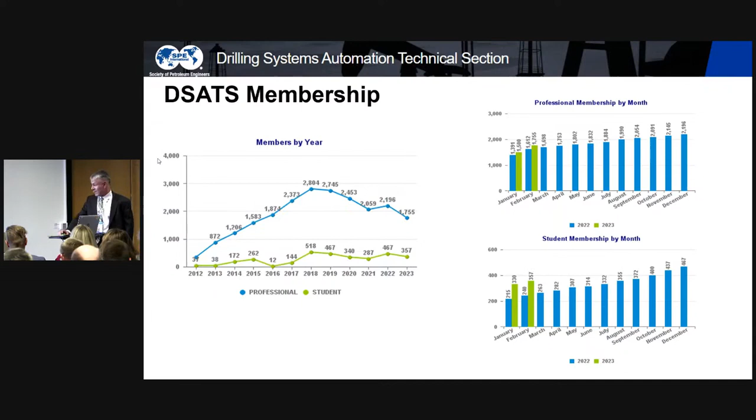One of the objectives for the section is to maintain this trend and keep engaging young talent. Here is similar information on how membership is distributed across areas geographically on the left side, and on the right, what subsegments are represented.

Typically, service companies have the lion's share. We're trying to balance this out and have more contractors and operators come in, as well as consultants, academia, etc. I think we have to have all the participants in.

Age-wise, I think we have a healthy trend. Majority of the members are in the middle. We have, of course, more senior people, but a good chunk of the younger population, and we need to work on that. So all in all, it's an improving picture. It's a healthy section that is improving the membership.

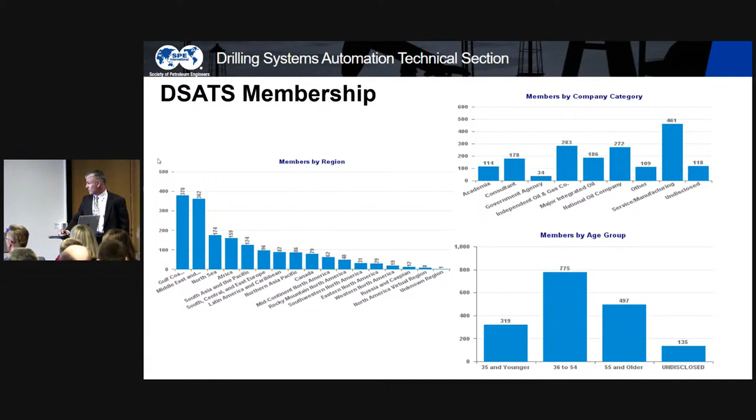So then this slide, I just want to spend a few minutes summarizing the current activities of DSATS. These are strictly volunteer-driven activities. We have a new website this year that complements the one we get from SPE. This gives us the ability to promote more interaction between members, have blogs, have discussions. The traffic so far has been much higher than what we had with the prior website. So that's very encouraging, and that's work in progress, it's ongoing.

Now, the real initiatives, the DWIS, Drilling and Well Interoperability Standards. This is probably the biggest initiative right now in DSATS. We have 4 work streams in there about the interface, the architecture of automated rig, real-time signals and semantics, and the drilling quality and data quality and uncertainty.

There is a website, you can find all the information and a lot of documentation. I think it's worth visiting that. There is a lot of information, a lot of material there, and for all of them, I would like to encourage people here to participate actively. I have a comment on that at the end, conclusion.

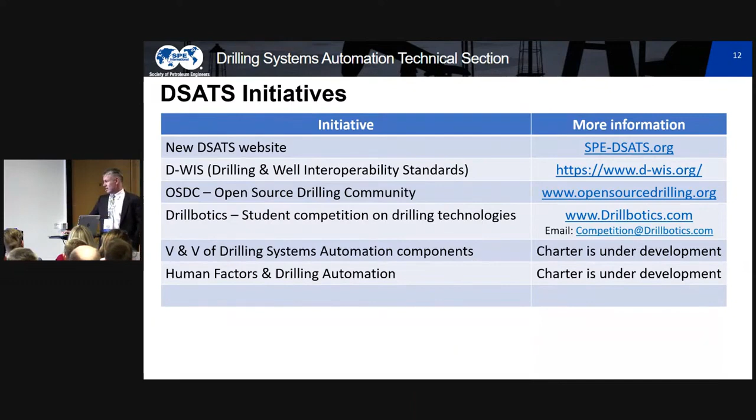Human factors is a huge area. It's not only with the operators, so we don't overwhelm them with data, screens, etc. But from the very beginning, when we design an automated system, we need to consider the process, situational awareness, what people know, what they see, what can go wrong, what if this happens.

So I have a couple of slides on the Drillbotics specifically.

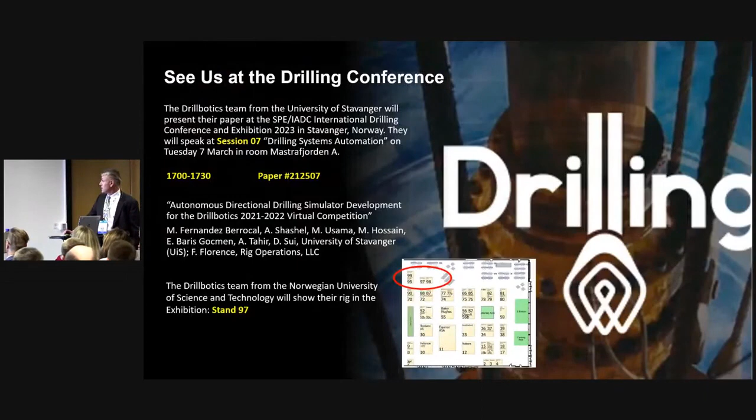Here is the information on the booth, but I'm sure you cannot miss it.

Other events that the section has organized. Last year, we had a joint session with wellbore positioning at the ATCE. We had a DWIS workshop in October. That's 2022. Going forward, we have the meeting today, the annual meeting, and an excellent panel and discussion at the end.

There is a workshop next week in Kuala Lumpur, drilling automation, breaking boundaries. There is a forum that Matt, Isabel, and a few others are putting together in April about digital workflows for well construction, which I think is going to be an excellent event.

And the ATCE this year is San Antonio. We're going to have a special session, a joint session with geothermal, with Tony Ping. I think that's going to be a very good event as well, and it's going to have a social reception at the end.

Those are the main events, but there are a number of webinars and SPE live events that we have throughout the year. We have 5 or 6 this year, only 2 allocated assigned speakers. We have a few openings. If anyone wants to share the work that they are doing with the community, please get in touch with me.

Something new that we tried this year is we have bi-monthly calls open to the entire DSATS membership. It's the second Thursday of every other month. There we give an update essentially to everybody, even non-DSATS and non-SPE members, anyone that is interested in drilling automation, update on the initiatives I explained earlier, what's happening within DSATS and how people can get engaged.

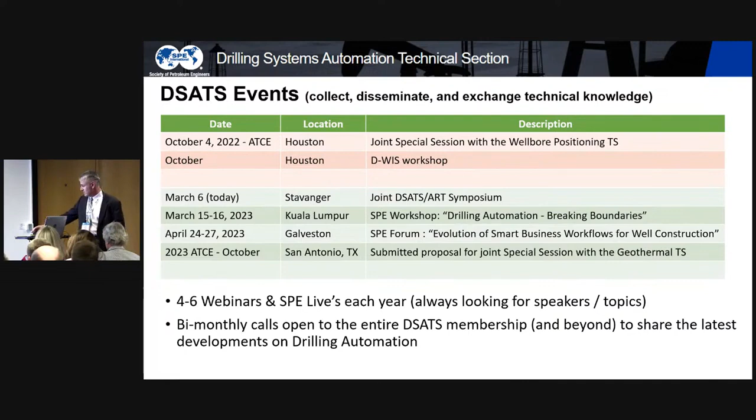Taking a step back and looking at the bigger picture, last year, at the end of 2021, early 2022, DSATS went through an exercise of rebranding itself, what we call V2, DSATS V2, trying to bring in new ideas, new charter, new people, etc.

So the result of that work was a long list of ideas and potential initiatives, and that made the foundation for a living document of initiatives that we can pursue. And to that, we are adding topics that come up in the symposium and the events that we have, like this one today.

Now, this is a pipeline that is full, I would say, but like I said, we need people to push those initiatives forward. They're not going to go by themselves, you know.

In terms of accelerating the pace of adoption of drilling automation technologies, one topic that always comes up is business models and how we reach alignment between the different subsegments. Even though we are not a business organization, we are a technical section, I think there is an overlap here, a sweet spot where as technical people we can work on technologies that make business sense and provide benefits to all people involved, and not develop something just for the sake of technology, then struggle commercially because the people who took the risk don't see the reward, and all these other reasons that slow us down.

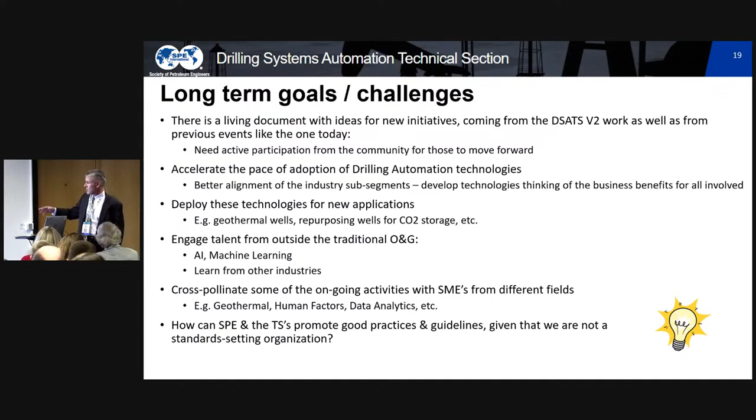Through DWIS and some of these other initiatives.

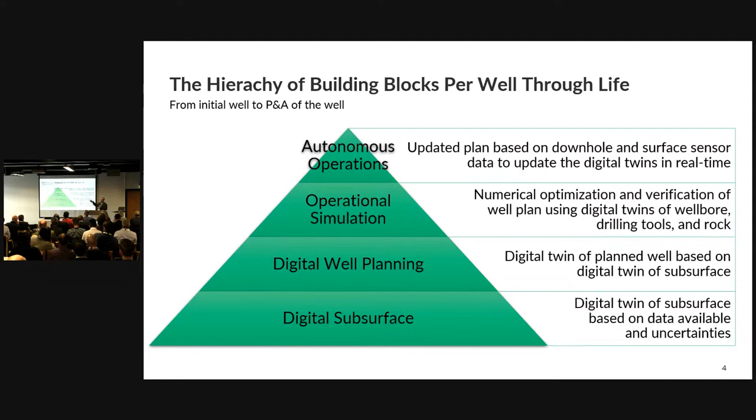So first, a bit when we're talking about digital twins - and I think this is an important element. We're talking about automation here specifically, but in reality, we're talking about huge end-to-end processes, big digital twins, where there are semi-established workflows already in place. I'll just go through them briefly and give you a flavor of the challenges.

I'm not going to spend so much time on subsurface, but before we start to design a well in Aker BP, there's around 17 data types that we need to collect before we start to design the trajectory. If you look at the subsurface domain alone, just in Aker BP, we're talking about up to 150 applications producing results, and we choose which become part of the design concept we're working on.

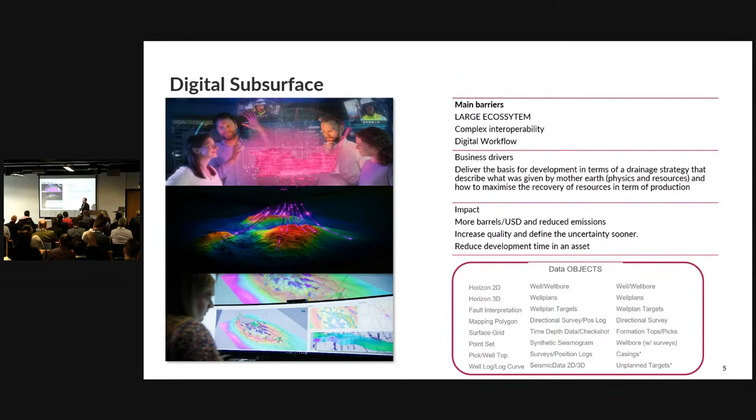And we are maturing this ecosystem for sure. It's a large ecosystem, complex interoperability, and different kinds of maturity when it comes to having a digital workflow. So that brings us over to digital well planning.

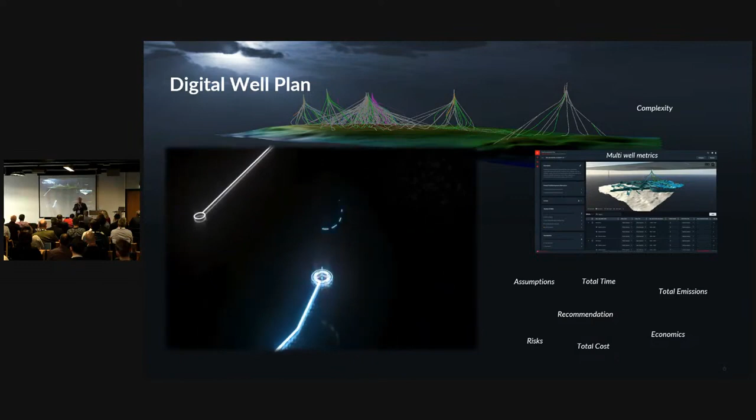One thing that's interesting in this concept, and the reason we made this animation, is because we often find ourselves a bit misunderstood. For us, it's not all about the data being in one place - the challenge we have is actually the workflow. This circuit board is just showing how Aker BP designs a well, how in the past we had to manually move all the data between applications.

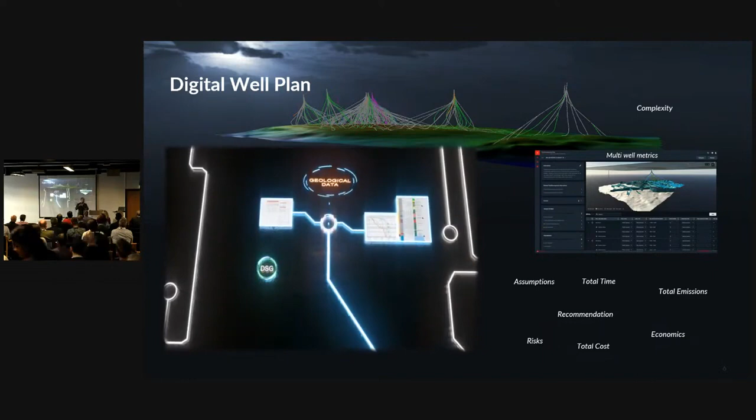We had to manually move all the data between 50 applications. Now that we have a digital ecosystem where the data can flow more seamlessly, it means we have a whole different speed. It means we can change out different components, work very differently on a platform, and plugins and other application layers are much easier to adapt into our work system.

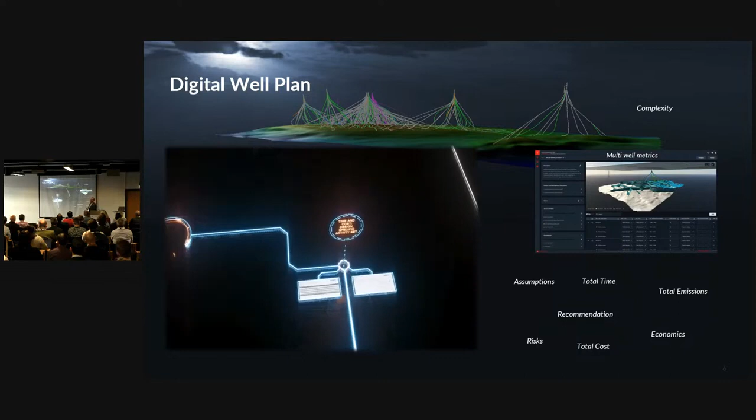Still the same challenges and still a challenge to keep an overview, but this has really fundamentally helped us change the way we work. It also means we can start to do more proper design earlier in the field development workflow.

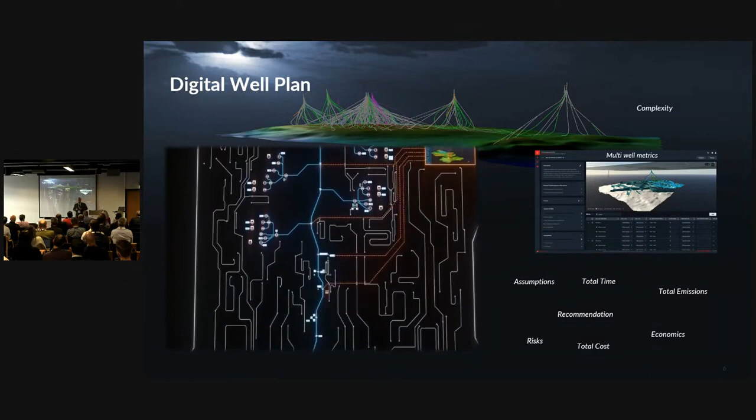So after we have designed the well, what do we do? Well, then we need other digital twins. Often in Norway we stand on ski jumps - I've not done that myself, and I would not like to - but sometimes I think that's how a drilling team could think. You have one shot, you're looking into the abyss, and you need to jump.

And what's expected from management is, of course, that we do this 365 with 5x20 style points every day on all our rigs. That's what's expected. And we have no place to really train and test out the scenarios.

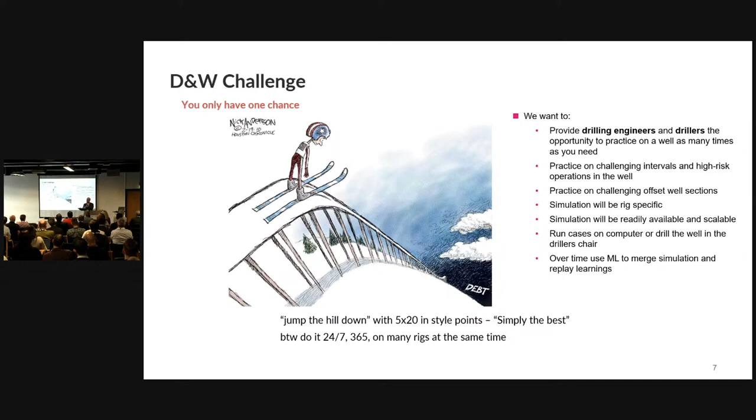So this was the concept of drill a well on simulator, to move away from drill a well on paper and start to utilize a lot of the digital twins we use in engineering as preparation tools before we go offshore. We've come some way on this, and there are a lot of vendors involved, but there's still work to be done.

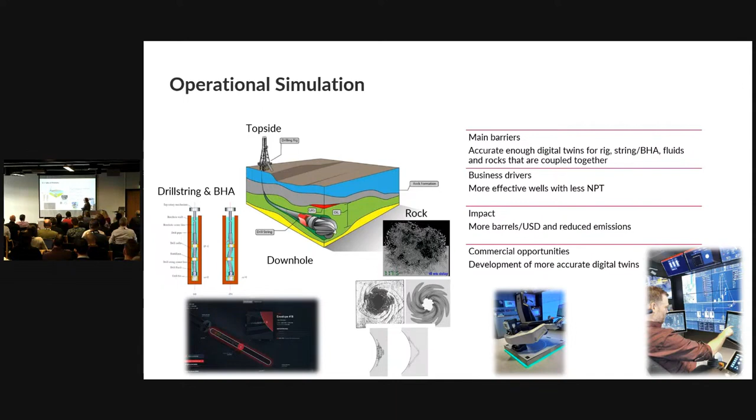And what's the last thing we go into then? Well, then we start to drill. And what happens is you have an enormous amount of data sets that are correlating and that you need to try and coordinate - whether it's robotics or visualization aids.

So what we've worked a lot on is how to capture all the engineering data and contextualize it with the sensor data we have from the tools or from the rig, to make it into a picture so you get to understand what's happening underground while you're drilling.

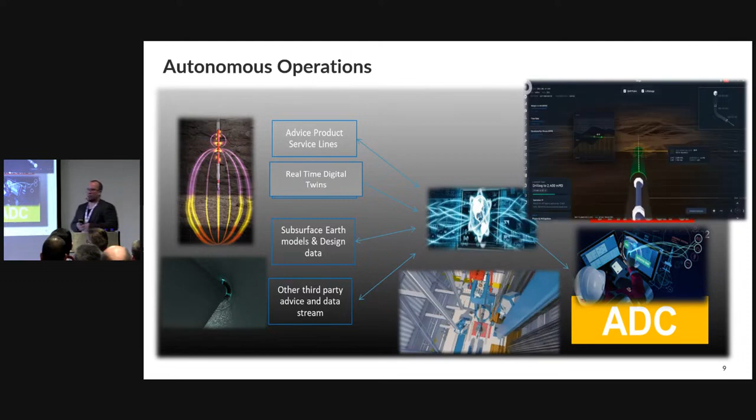These are technology sets we're really exploring, also combining them with, for example, more along-string measurement tools that we can use to fuel the different digital twins while in operation. Because a 9 5/8 hole isn't a perfect 9 5/8 hole after you've drilled it - there will be cavings, there will be different things. It would be good to see, when running the casing, if there will be a challenge in a certain section. It's an example.

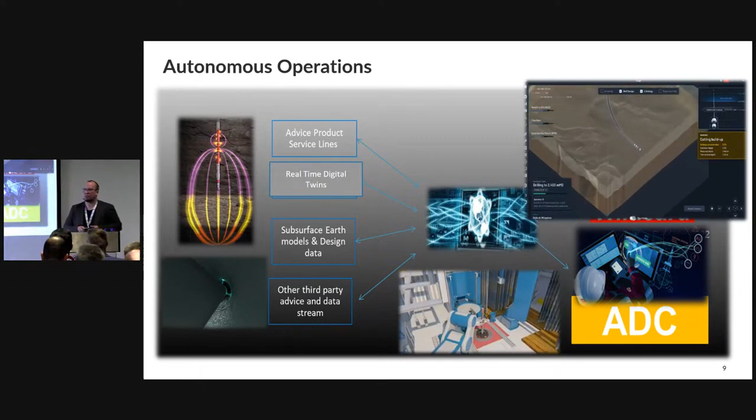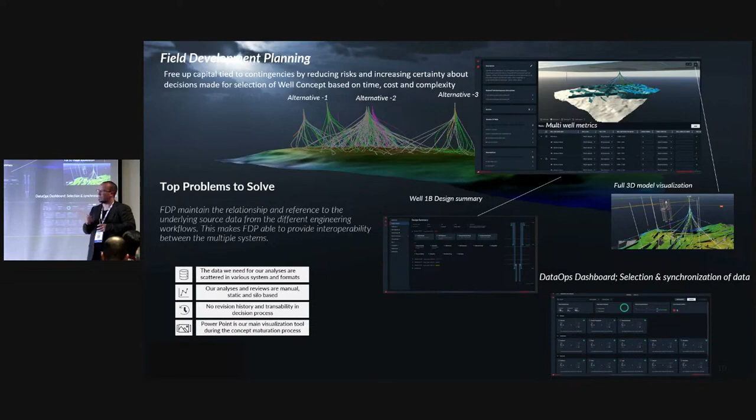The last thing I'd like to talk about is a bit of a top problem to solve: our overall ecosystems and how we run our projects and develop our assets. The challenge is that we have data spread around in various systems and formats. Reviews are manual and often silo-based. There's no revision history or transferability. So when interconnecting business units, if you want to know exactly which subsurface interpretation was there when you designed a well, that's a manual thing to figure out. There's no system that helps provide that lineage. And at some steps, we're still a PowerPoint-driven industry when it comes to making decisions.

So we've been working very hard to establish bigger data-driven platforms where we can interconnect the different platforms together, so that we have that kind of overview, but still have the flexibility for each business unit to develop their own workflows.

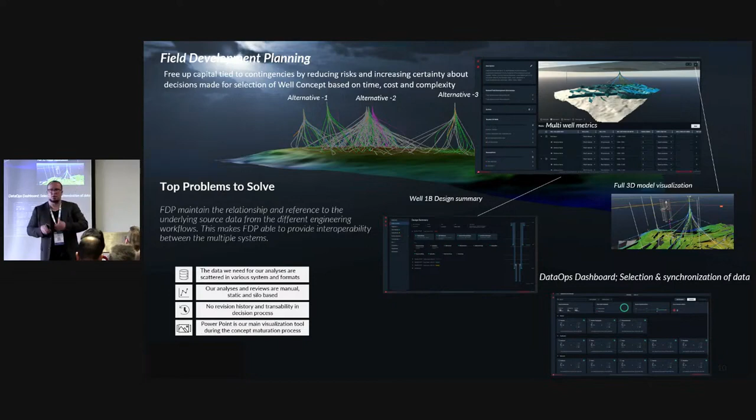That brings me back to the start. What does it mean to become data-driven? First of all, it means the obvious: to make the data available for everyone that's part of making a decision. We decided we can't boil the ocean, so we're not going to do everything for every domain, but we're going to start with the decision points in each project to make sure we capture all the data that's there, where it's coming from, and what the uncertainty and quality is.

Another thing we learned is how you contextualize the data set. How do you handle tabular data? You contextualize it toward the trajectories and the geospatial domain. That means you can look at 100 Excel sheets or drilling reports just by looking in a 3D view at the curve of the trajectory itself. You can also correlate to events that happened at nearby wells in that domain, in a totally different way than looking at tabular reports.

The bonus we already see for a lot of the work we do in Aker BP is that we get a lot more drive within the teams, a lot more collaboration, and the silos are broken down. So that brings me to the last one: be a rebel with a cause, collaborate, co-innovate, and transform. Thank you.

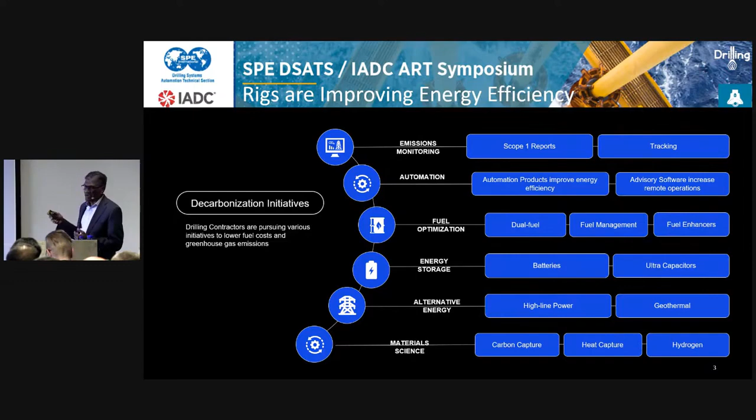At Nabors, we're looking at our energy transition strategy at this point, technology, and also our workforce. Today's meeting will focus on the technology part of things. But before I did that, I wanted to talk a little bit about why the energy transition can be important to automation. Pretty much every oil and gas company is looking at energy transition at some level, whether it's just basic Scope 1 reporting to automation, fuel management, highline power, batteries, capacitors, and all of that.

So what does that mean for automation? When we look at automation, some of the key things we're managing is obviously machine performance depends on how much energy is available. When you look at energy optimization, you're trying to figure out how many engines to run, how much power you'd have, trying to optimize available power so you can reduce energy costs, or at least reduce emissions due to energy. So in an environment where you're trying to have limited energy, the performance of the equipment and how you manage that becomes critical.

The drilling process itself is a very spiky process in terms of energy consumption. Every time you take the blocks up all the way at full speed, you get a huge spike of energy, and depending on what rig you are, that can be more than one generator itself. So how do you manage that within the context of trying to be optimal in your energy usage?

So stored energy is another solution that people are coming up with, where you can reduce the size of this peak, what they call peak shaving.

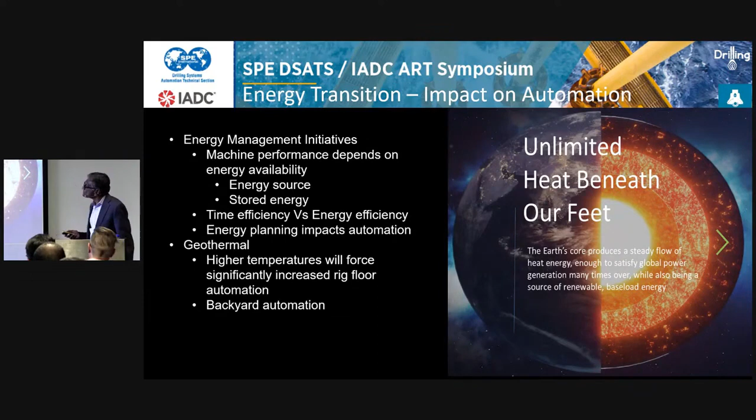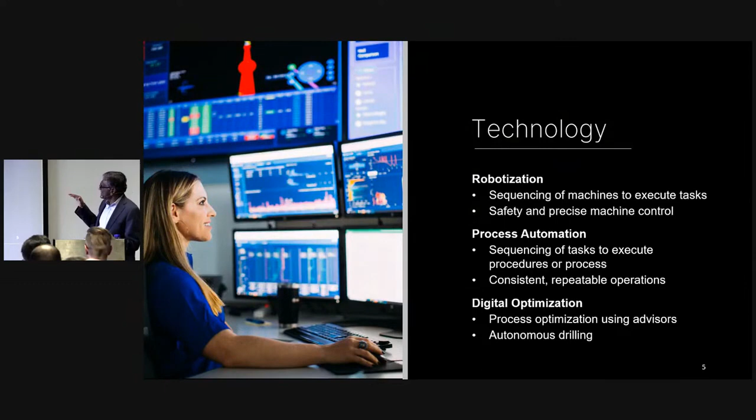From a technology perspective, we look at automation technology at 3 different levels: robotization or machine automation, process automation, and digital optimization, which we also call advisory automation. From a machine automation perspective, we have a platform for sequencing the machines to execute tasks, and process is sequencing the tasks to execute a procedure. I'll go into a little more detail on all of that.

When we look at automation of machine tasks, the goal is clearing the red zones. We've got a number of individual machines, whether they are pipe handlers, stabbing guides, doping machines, mud buckets, you name it—automated equipment to do all of this. But what's important is that if you're going to sequence automation at a higher level, all of the individual tasks of these machines have to become elemental tasks available as a library that you can sequence together to construct a whole big procedure. That's what we've done with our machine automation layer: defining and standardizing all these tasks, and creating an automation library of individual tasks.

The second thing I want to bring up is collaborative robotics. When we talk about robotics and automation, generally the assumption is that the machine does things and the human is out of the way. These days we have a lot of robots working together with humans. So we need to think about an environment where the robots are helping the rig crew, as opposed to just the rig crew coming completely off. That may be a halfway solution that we may be able to exploit.

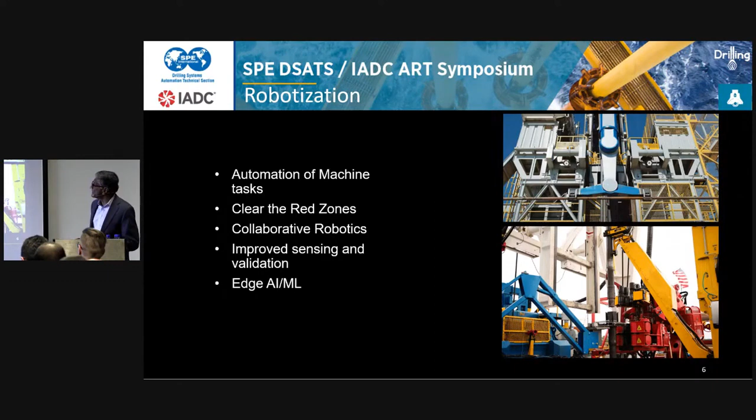So from a process automation point of view, we have developed a process automation layer where we can sequence all of our tasks based on best practices.

We are working to digitize both the operator and the service company's best practices in terms of how they want to execute it. Today, instructions are given to the driller verbally, either by the well site superintendent or the crew chief for the service company, about how they want them to tag bottom, how they want to start up pumps. All of these instructions are manually given to the driller. So we want to digitize those instructions, make sure they're executed at the right time with the right parameters, and keep a log of what instructions are actually executed, so we know whether they were followed or not.

That's the process automation layer we're developing. One of the key points in process automation, particularly if you want to take that into collaborative automation where you're inviting service companies to participate, security becomes a big issue. Who's in charge of what task? When can they execute it? What parameters did they send? Did you execute those parameters, or did somebody else's parameters get executed? So that's something we built in to understand whose instructions you're executing.

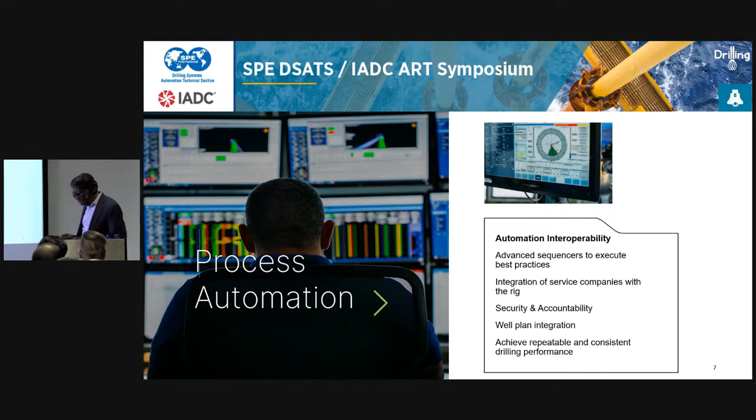The last part of our framework is the digital optimization, or the advisory automation. Here we build a digital well plan interface, receiving the digital well plan and creating a sequence of how that plan is going to be executed on our rig with whatever level of automation is available. Not all rigs are built equal, so depending on what automation is available, we create a rig action plan, which is taking a well plan and creating a rig action plan for execution.

When you're executing a process, there are a number of different expert service companies that can provide advisories and set points. So we have an interface where advisories can connect to the rig and provide them. The advisories can be built into ourselves, at the edge through an edge service, or remote.

The second part I wanted to talk about is infrastructure optimization. Today, if you want to build an automation system, you need all the computing power, the edge AI/ML infrastructure, and you need to build network security and communications.

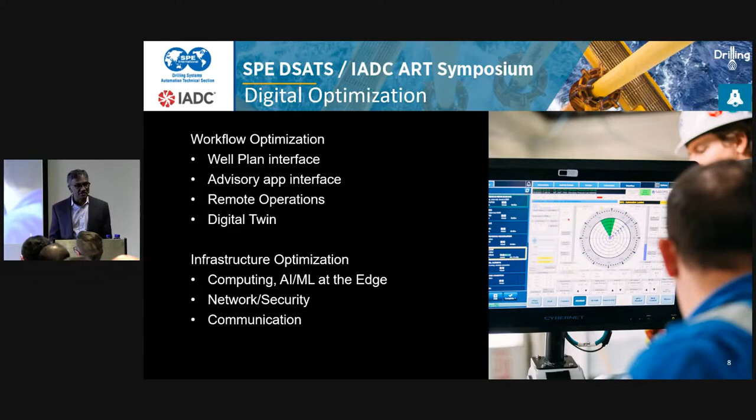So if we are going to attract that talent, whether from Google, Amazon, or universities, we're going to have to change the perception of our industry. With the robots, the AI, ML, and the digital twins that were discussed, I think there's an opportunity to do that.

One last thing I wanted to mention is that drilling contractors have a significant role to play in automation. I personally don't believe true collaborative automation is going to become reality unless the drilling contractor becomes part of the story. Drilling contractors have to own the automation fabric, the whole infrastructure, the security—all of that has to be owned and provisioned by the drilling contractor.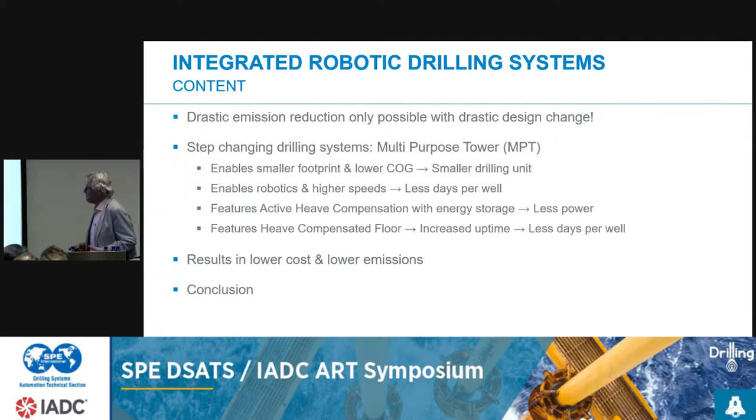You really have to look at a different design. You need a big design change to really make it happen, in our view. The multi-purpose tower, the MPT, is an enabler to do this, because this tower has a smaller footprint, a lower center of gravity, and allows higher speeds - that means less days per well. We also have an integrated heave compensating system in the tower, which we typically use in cranes, which saves a lot of power. It also features a heave compensated floor, which means more uptime, resulting in lower cost and lower emissions.

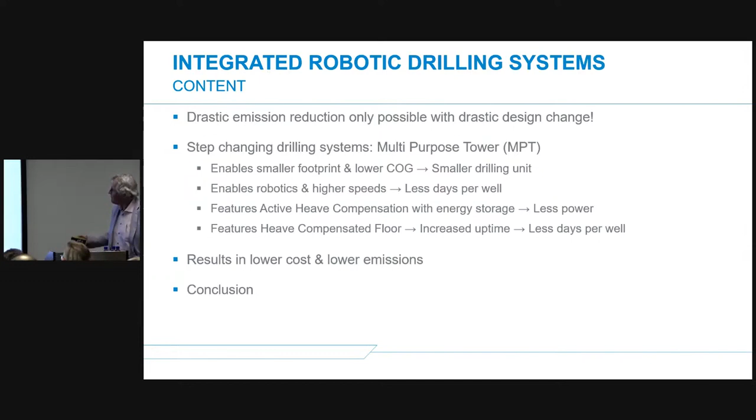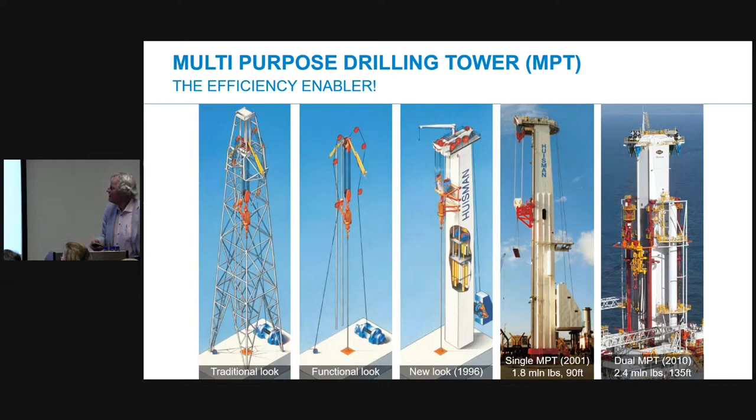The first dual ships we did was for Noble, the Globetrotter ships. You see the wind load on these towers is about half compared to traditional. Also, the active heave compensation requires only about 10% compared to traditional ones. And you also see the drill floor is only 5 meters above deck.

And you see deck space is even more - it's more than 10%. Although it's a compact drill ship, you have 10% more deck space. And it all results, basically, this whole design in half of displacement.

And actually, initially people were like, who cares? But nowadays carbon dioxide is becoming the driver. So certainly this is now becoming a popular vessel.

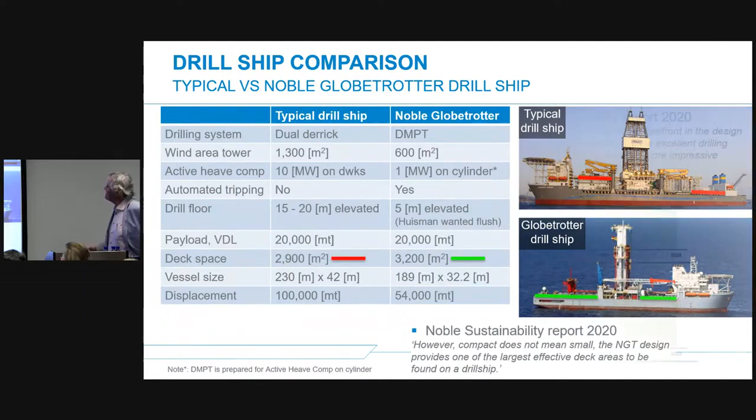Noble is now also presenting it as a compact drill ship, which is not small, but also very effective. You see here the comparison in carbon dioxide. The emissions here are 64 tons per day. A traditional vessel is close to 150 tons per day. So on a yearly basis, these two ships reduce 60,000 tons of carbon dioxide per year.

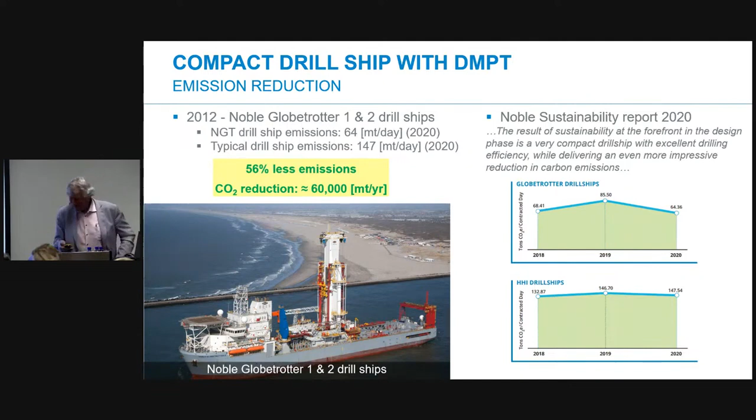This is all data from Noble. So you see now people start thinking about carbon dioxide, which was not the case in those days. When we designed it, we looked at how we can reduce fuel consumption, make it more efficient. Nowadays it's carbon dioxide - we use only half the fuel consumption.

So what we did after this one, we wanted to further improve it. We built in our own yard a complete multi-purpose tower. It's called HIT, Huisman Innovation Tower, where we are testing all the new technologies. It's, well, the biggest tower in the world, I think.

Hook load 3.6 million pounds. And we're running here with 180 feet stands. We run it, measured 5,600 feet per hour. So it's really extremely fast when you see it.

It's completely robotic. It has auto slips. Everything is automated - nobody's touching any pipe. The tower also can swing because you want to simulate the vessel motion. So the tower can swing plus minus 5 degrees in 10 seconds.

So if you're on top of the tower, you really get sick. I can tell you that. Yeah, people think I'm a bit crazy, but I slowly start believing I am.

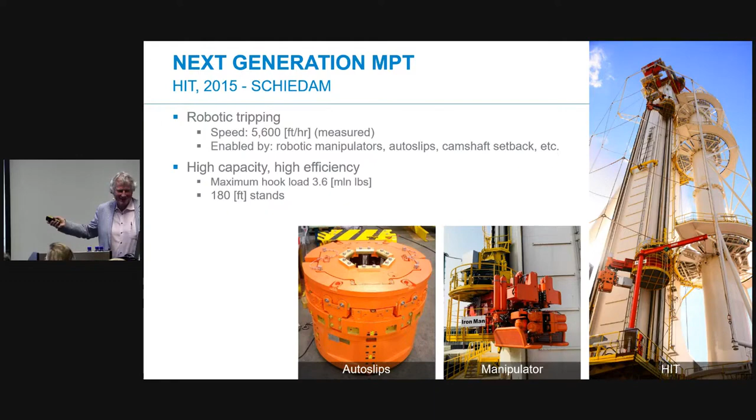By doing this, you can test really all the automation and learn from here and then put it on the next vessel. We also have in the tower a compensator, but it's a passive-active compensator. What you do here is balance the load basically with nitrogen, and then you need only a very small winch to activate it. So you need about 10% of the power to do active heave comp, and all this stuff is inside the tower, so nothing is outside.

And well, we typically do this on cranes. So this saves a lot of energy. It's about 10% - of about 10 megawatts, you then need only 1 megawatt, and less wear and tear because it's completely enclosed. How simple can it be? But you see it, if you can't see the tower, I will show it to you.

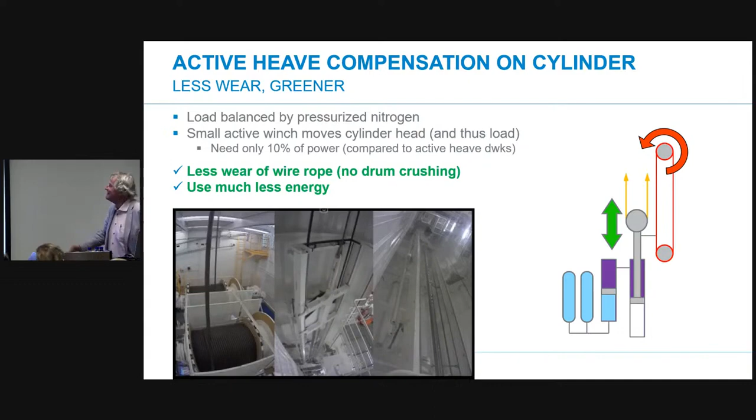So we had visits from the Chinese, and they are more open to new technology than the Western world. And they liked it, and they said, okay, I'll buy one. So we did - this was delivered to COSL more than a year ago. It's been more than a year in operation.

And you see the Chinese are more open-minded than this industry sitting in this room here. Huh? Nobody says anything.

And we commissioned it in COVID time. Can you imagine how this was? Extremely difficult. Our Chinese employees, who had never seen a rig before, were commissioning it all by remote.

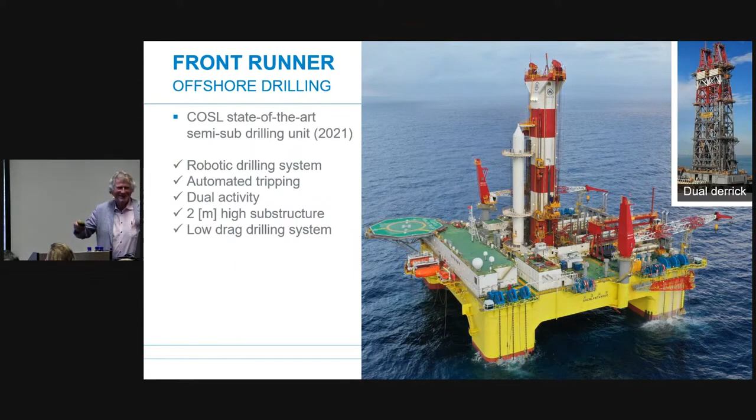Okay, and then the next step, of course. What's next? Next step is that we want to increase the efficiency by putting more robotics on, so all the pipe handling is completely robotic.

This is actually what our life is basically. And also what we are doing here is connecting the drill floor to the seabed. So we have passive cylinders pushing up the floor, putting an uplift, and then you make a cable connection from the top of the riser to the floor, and basically then you're mechanically connected to the seabed. There's no sensors, nothing, it's just mechanically connected, and the floor is stabilized.

And we can do that because the guide of the floor is the mast. We did it on the Globetrotter. You see there also removing the floors, and it's completely guided by the mast. So the mast here is an enabler to guide the floor. That's why you can do this.

So it's a flush floor when it's not working, and it's completely hands-off. All the pipe handling is completely hands-off, nobody is touching pipe anymore. We also have a special crane for offloading, a 3D motion compensated crane.

I can tell stories about that, but I don't have time for that this time. Also for offloading vessels in a much more efficient way than how it's done today, so we have lower cost and lower emissions per well.

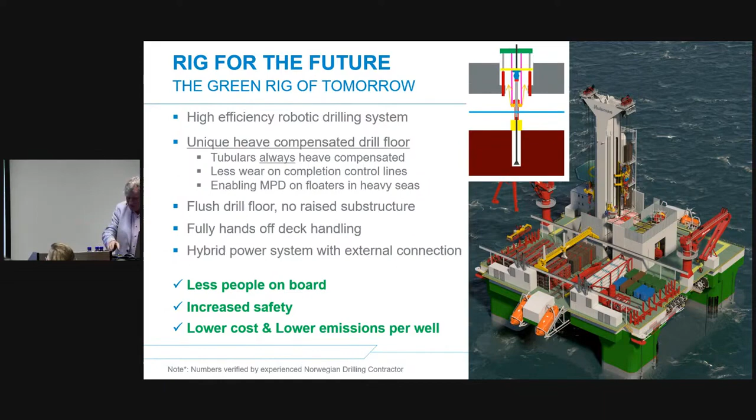We can do the same basically on drill ships, the same technology, whether it's on the semi-sub or drill ships makes no difference. So we connect the floor also here to the seabed, and you have no influence from the motions.

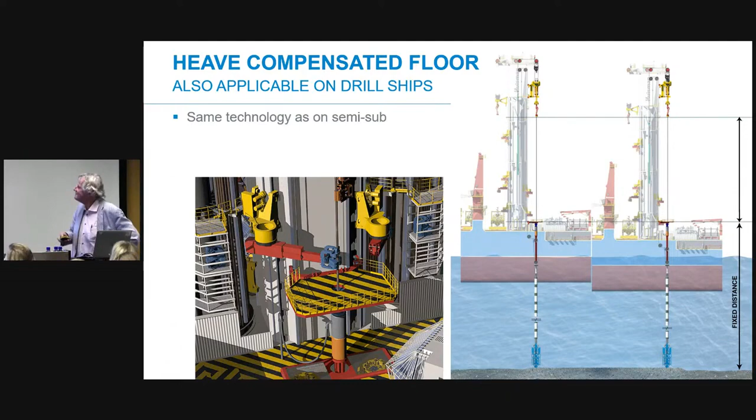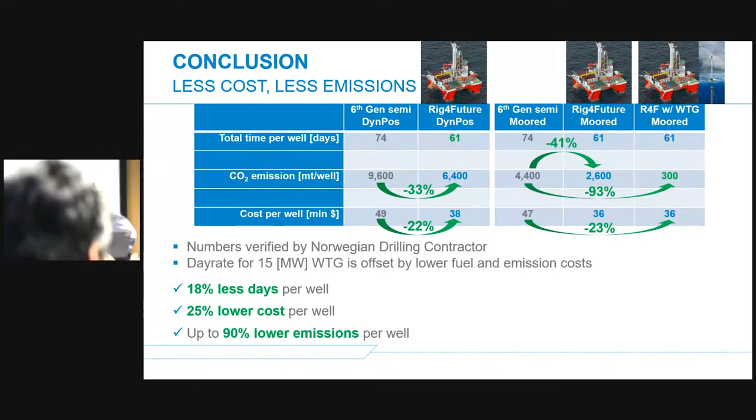And we analyzed it with a well-known drilling contractor in Norway, all the data. We worked together with him to analyze everything to see whether we were right or wrong. We thought, if you look at when we did it on DP mode, we looked at the 6th generation semi. The number of days they had on well was 74 days, and we did the first one in 61 days because of all the automation and other tricks. Carbon dioxide emission was more than 30% less, and also lower cost per well, significant.

And when you're in mooring mode, it's even better, then you have even less emissions. And if we connect a wind turbine next to it, then we almost have zero emissions. As I told you, we are in the middle of the wind turbine industry, so we know how to do this. So you have significantly less time per well and significantly lower cost, and hardly any emissions if you hook it up to the wind turbine.

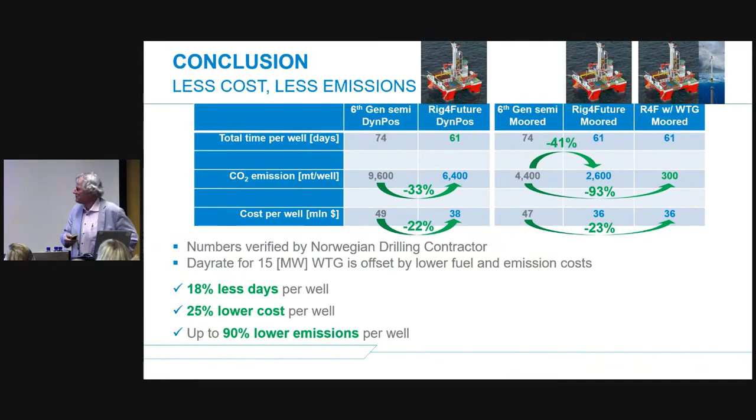Small animation, you see the pipe handling. It's a very small one because I had no time, so I had to reduce it. We have a long animation somewhere else.

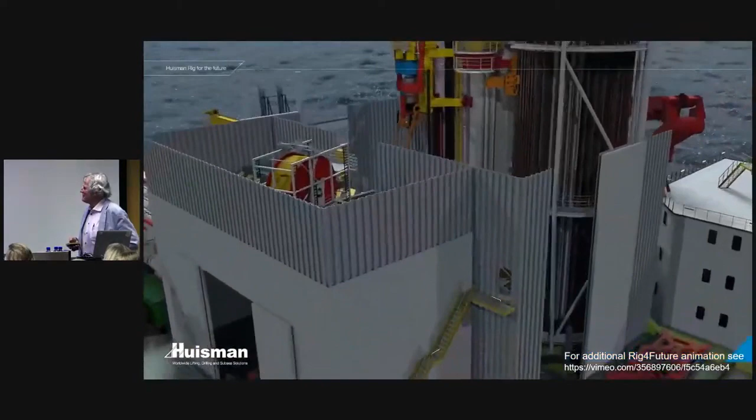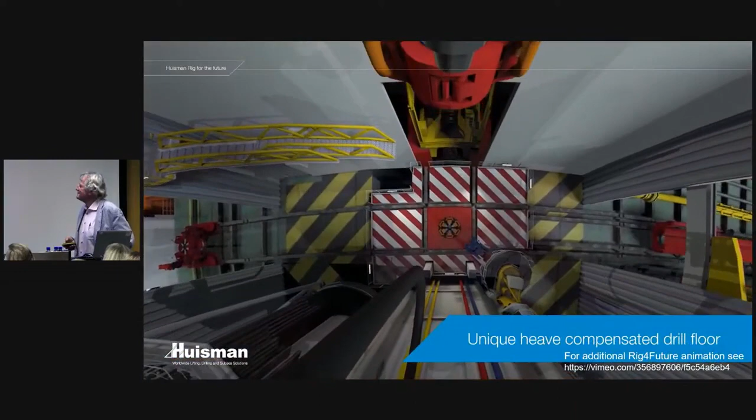You see the rig is moving and the floor is not moving, so it looks like drilling from land. Everybody in this room knows the benefits when you don't have motion.

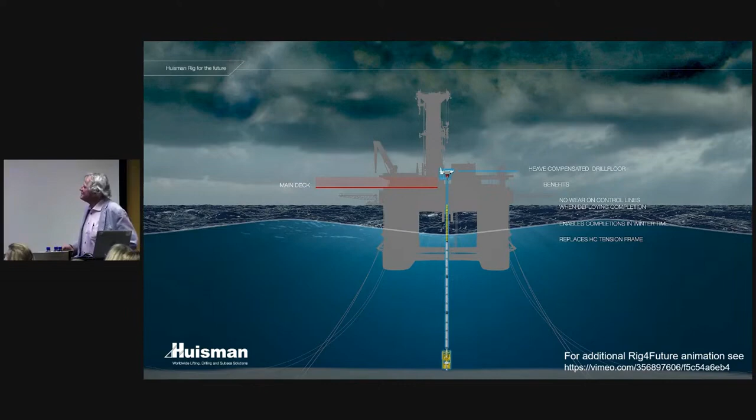So, the conclusion is quite clear, I think. The robotic design, the robotic system gives you high efficiency, the unique heave compensated floor, no more people touching pipe, and of course we can also have hybrid power from a wind turbine or whatever. And then we significantly save the amount of people on board, we can take off about 40% of the people.

This is all verified by this drilling contractor: increased safety, of course, and 25% lower cost per well, and of course lower emissions and able to drill the undrillable. So let's get it done. That's it.

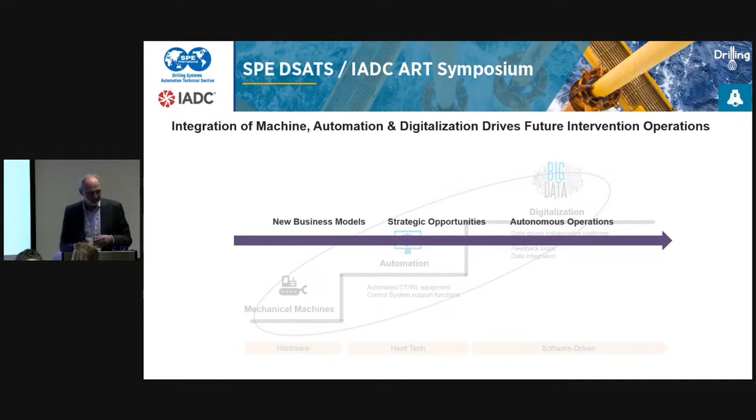So we see that in new business models. We see alliances coming up, where different service companies and oil companies are working together. We see strategic opportunities where different tool providers, maybe within a service company, are getting together to offer a better product. And we see all this also leading into work within autonomous operations.

One example is here from Aker BP's onshore operation center, where the planning, execution and analysis of all the operations being performed by SLB and Stimline services are part of this digital, data-driven workflow. Stimline provides the stimulation vessel, SLB is doing all the coil and wireline, and Aker BP is obviously the energy company.

And there's a bonus sharing scheme within this. Why can I do that? Because everything is integrated in one digital system that basically drives this planning. The operational instruction, or the digital well plan, is being generated based on standard operating practices. All the different inputs that come from the different data sources are connected into this system. And when the job has been done, what happened is unambiguous, because all the data has been collected.

It's available for all the stakeholders here to view and review. So this drives not only this operation center here, where the different companies are situated onshore, but also what's happening on the rig, where they all get access to exactly the same data from the same system, which is the engine in this motor.

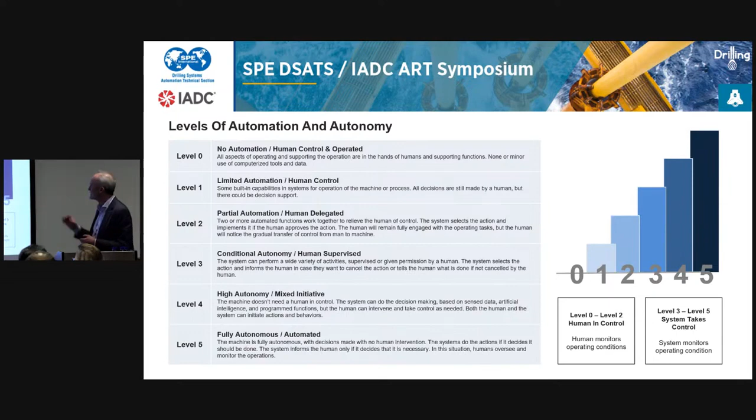So anyways, this is a way of maybe defining what is automation and what is autonomy, which we think is pretty neat, and which gives us a roadmap of where we want to go and how we want to do it.

So back to the objectives and the workflows. It's become more and more clear that, especially for more advanced interventions, there are actually two workflows. Before me, a lot of people have said this in different words, but the energy company's drilling intervention workflow, based on digital technology, is getting more and more structured, structured in a digital way. That horizontal workflow at the energy company becomes more and more intelligent, with more and more data being available.

I know some larger service companies feel they can do everything for an operation, and certainly they can in certain georegions. But here in the offshore industry, I think the cost of drilling and the value of the well over so many years of production is so important or vital for the energy company that this workflow will only be more and more developed.

We see how energy companies are investing in digitalization projects, like Arnfinn was talking about, integrating different data sources, doing all this in a much leaner or more agile way in terms of getting that workflow to work.

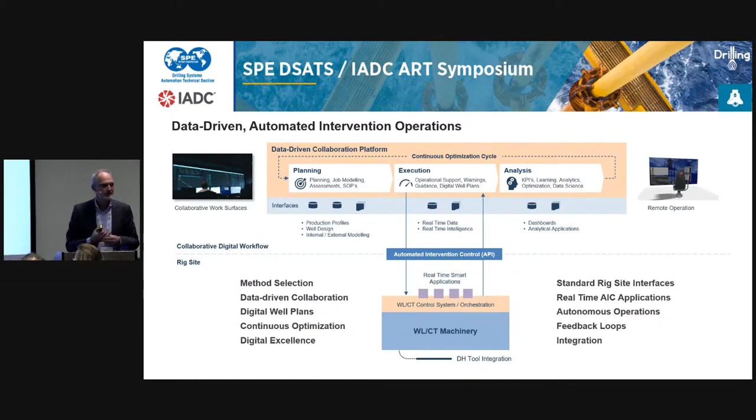I call this automated intervention control. I stole that, or mimicking the drilling side, because it's in a way very similar, but with the difference that you're working with intervention equipment, which in one way is simpler because there's no jointed pipe. On the other hand, you're conveying a 4mm OD wire 5,000 meters into the well, and it can be challenging for sure.

So if we have the same picture in a way, but shown differently - there's this digital collaboration platform that exists. It does all this - planning, execution, has job modeling for wellbore hydraulics, tubing and forces, heat transfer, and there's an analytics function that works on this. It generates a digital well plan.

There's coiled tubing and wireline equipment that actually has a pretty nice control system, and that can have sort of what it needed to be applied in an autonomous ecosystem. What is not there is an interface between the digital collaboration platform and the coiled tubing wireline system which is standardized, and you guys have talked about this earlier.

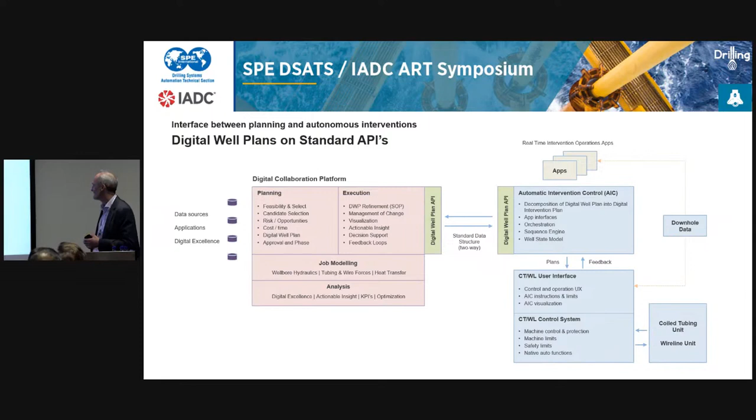Here it goes. So what are the barriers and what are the opportunities in data-driven automated intervention operations? Barriers include APIs or standards that make the rig site and the workflow on top talk to each other. Rig site equipment in many ways is not up to the standards. Even in the North Sea, there is 20-year-old equipment still running wireline operations.

Obviously, R&D and development costs, trust in automation, and understanding the value of automated intervention operations are barriers too. There are many companies that don't understand why we should do this. I mean, I talk about energy companies, but especially up here, as I said a few times, the push is getting quite tough on this, and several companies are working on it. And contracts, alliances, business models, etc. But that's also opportunities.

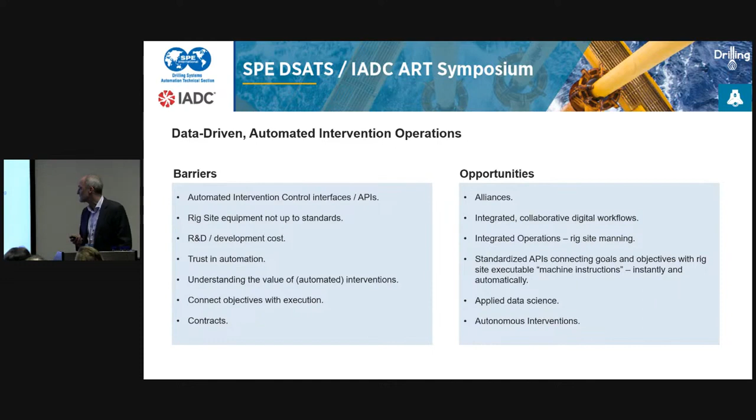Integrated collaborative workflows—you can see different service companies with different expertise working together in a bucket, providing that service to the industry. Integrated operations, rig site manning, of course getting the amount of people offshore reduced, driven by digitalization, definitely more digitalization and automation, but still both. Another opportunity: apply data science, definitely, and more autonomous interventions.

That was me. Thank you.

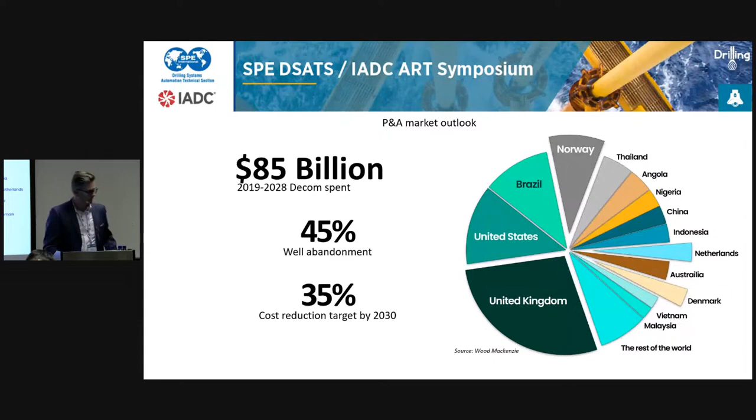So how do we approach P&A today? Most of the steel we're actually running into the well with a drill pipe is actually dumb steel. You can rotate it, you can set weight down, and you can use flow on it, but not much of it we can actually do on demand with. And most of the parameters we're using are actually what we have at the surface. We're not using most of the information we have down in the ground, where we're actually doing the operations.

So our procedures and what we're doing is actually based on what we have learned from surface data, and what I have as experience, what you have as experience. But we're not doing that with the data downhole. So for instance, I can feel that milling a packer I need 5 tons on it and 120 RPM, but you might say your experience is, no, I need 2 tons and 140 RPM. Both of those can be correct if you're on the right application, but you actually don't have that data—you actually don't know what's going on down in the well. And each well is different.

When it comes to data, we use limited of the data we're actually gathering when we're making our wells. So when you come back to doing the P&A, you don't have all the data to make the decisions you need. You need to gather more data before you can do your P&A. And experience is normally shared from person to person and company to company - we don't have a global platform where we actually share that experience. Regions also have different regulations, so one region and another can do the same application completely differently. We are not talking well into the industry.

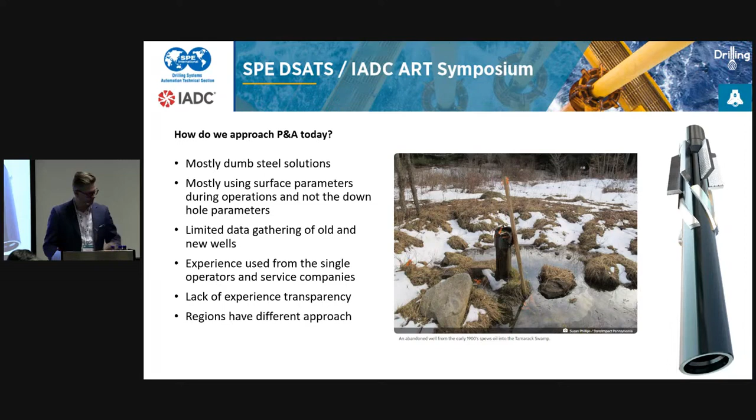Our industry today has a lot of solutions, as been said earlier today by Ryan. Drilling is a lot ahead of us - they have optimization, they have sensors, they have downhole data that we can actually use when we're down in the well, instead of going in, as I said, our dumb steel. So we actually can understand what's going on in the well.

At Baker today, we have implemented software with algorithms where we pull in the old data and the new data, so we know more how to set up for different applications when we plan the job, execute it, and also what we learn afterwards. That means we take live data from the well and surface data, adding it to the program. When we start a new well or operations, our field hands or engineering plot in what we're going to do, and it comes out a recommendation based on experience from data down in the well. So it's no longer that I do what I think is best and someone else does what they think is best - you now actually have data to do it.

For myself, I experienced downhole data 8 years ago. I was leading a large slot recovery P&A project, and 3 of the wells were really similar. We had 3 packers at 4,500 meters that we needed to mill away, and we needed to get access and place a barrier. The first 2 wells were done in 16 hours and then 20 hours - that looks good for our procedures and the field hands and everything. Then we used downhole data.

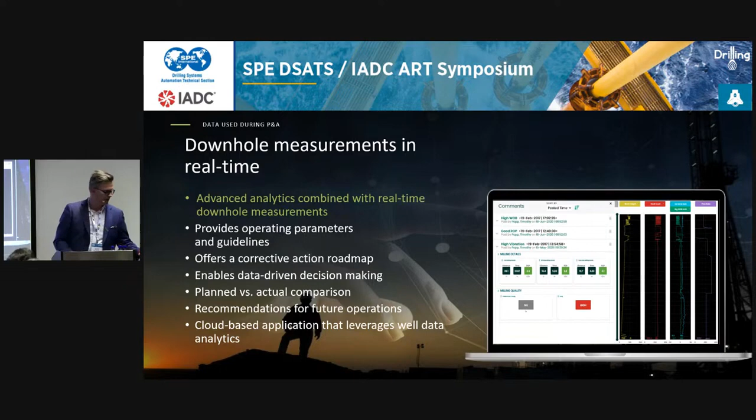So when we make a well today, we're getting a lot of data. But how do we actually use it? How do we gather it? And how do we share it so that we can plan a well in the end and use that data instead of starting back again with new data?

We need reservoir data, we need integrity data before we start planning our P&A, and most of the solutions are out there today that we can actually gather this data. For instance, you drill a new well - you drill out, put your casing, do your cement job, then drill out your cement and continue for the next section. But you actually don't have the integrity of that cement, because for the industry to do that, they need to spend time rigging up wireline, doing that logging, and then rigging down wireline again and continuing drilling, because we don't have ultrasonic on drill pipe.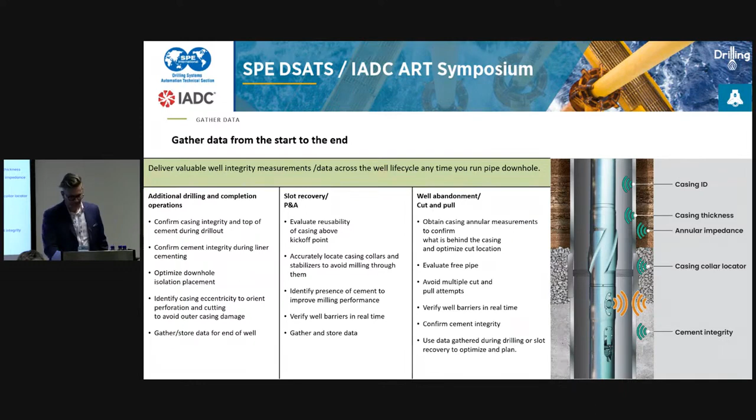For us, when we're doing now slot recovery here in Europe, some areas are actually spending up to 40% of its time for that new well that's going to make on P&A, because the focus has been on optimizing drilling. That's where we put in our focus on getting fast drilling, and we're actually now spending almost half of our time P&A-ing before we can now go out. So by getting data and getting more information, we can now lower that time on the P&A, so we can get our wells faster up and production up.

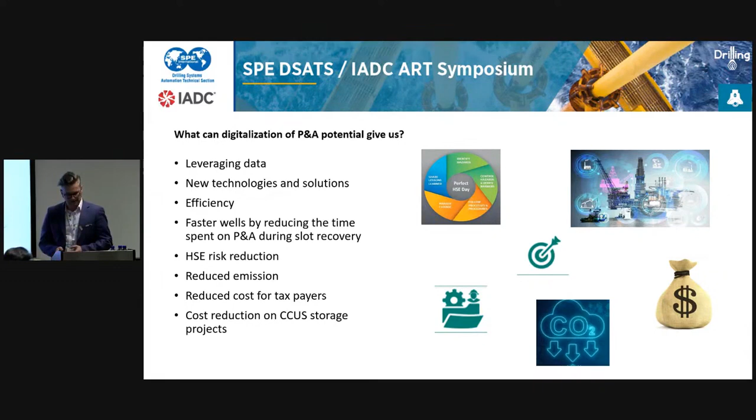Yeah, I think that's what I had.

Should I just stay up here? Yes, please. Thank you, Knut. We can have the panelists please have a seat at the table. We will begin the discussion part of today's symposium. Great. Well, fantastic. Perfect. Thank you very much. So, I will let Lee present you.

Well, gentlemen, thank you for taking the time today to spend with us discussing all things well construction automation. With that, I'd like to just start with the first question. Could you please give a clear example, starting here with you Joop, of how automation has impacted the performance of your operations?